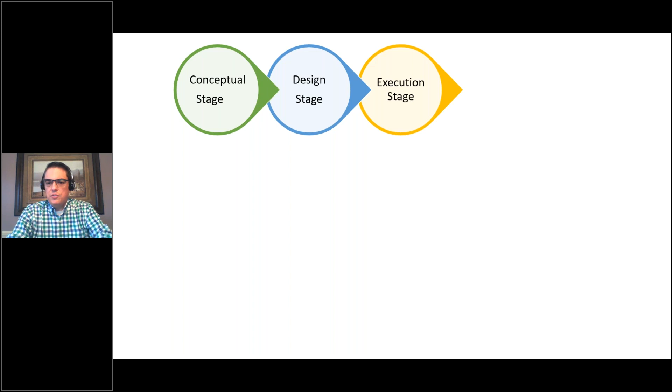Okay, so this morning I'm going to talk to you a little bit about some cost and benefit work that we've done here at MSU on mass timber, and it's really wrapped up around four themes: construction, markets, carbon, and energy. So if we start with construction, we know if we go through the process of constructing a building, we begin with the conceptual design stage, move into design development, project execution, controls, and then ultimately closeout.

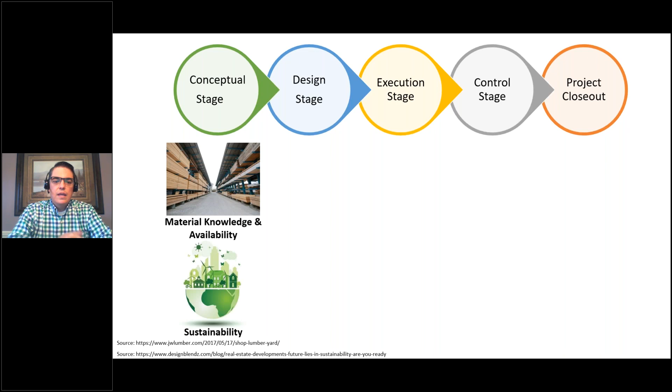What we know from early on in the construction process is material knowledge and availability of materials is a key decision during conceptualization, as well as more and more concerns about sustainability and how a building can be delivered in a sustainable fashion. Similarly, when we get into later design stages in the execution stage, we worry about costs and project duration. And then as we get into later stages of the project, we worry more about customer satisfaction and final costs and project duration.

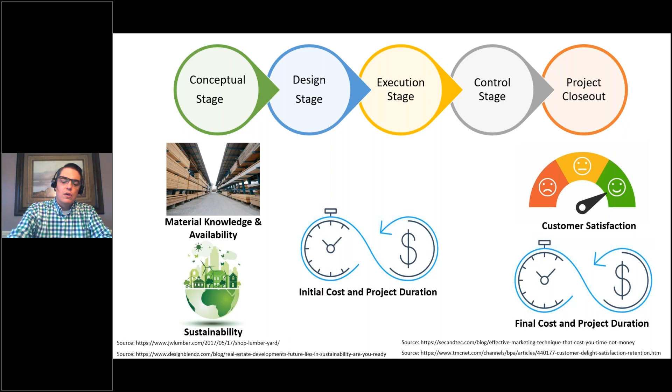And so the question is, what does all of this have to do with mass timber? And these are really cost and benefit related issues and concerns throughout the life cycle of a project. And if we begin early in this conceptualization phase, sorry about that, let's go back to later phases of the project when we get to closeout.

Using some projects that have been executed in the Midwest as an example, if we take a standard $100 million, whether it's steel, concrete, or mass timber project, we know that indirect costs will range somewhere in the $2 to $5 million range, and then time-dependent indirect costs will range from $1.5 to $4 million.

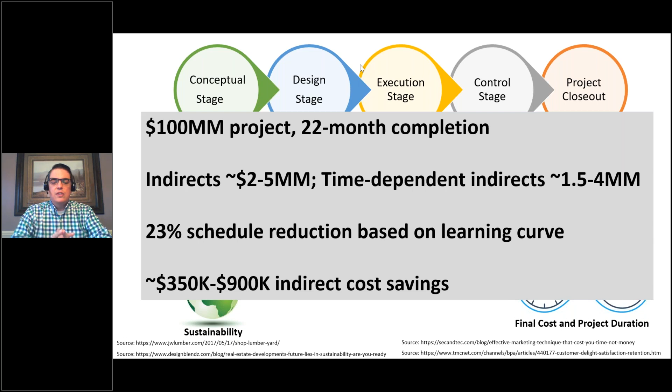If we look at schedule savings that are possible based on learning curve for new firms that are getting into mass timber or experienced mass timber firms that are perhaps executing their third, fourth, or fifth mass timber project, we see that schedule reductions of about 23% are possible, which just on general conditions and indirect costs can lead to anywhere from $350,000 to $900,000 in indirect cost savings on a $100 million project. So the question becomes, if we can save this kind of money just on indirects using mass timber, why aren't we doing more mass timber projects?

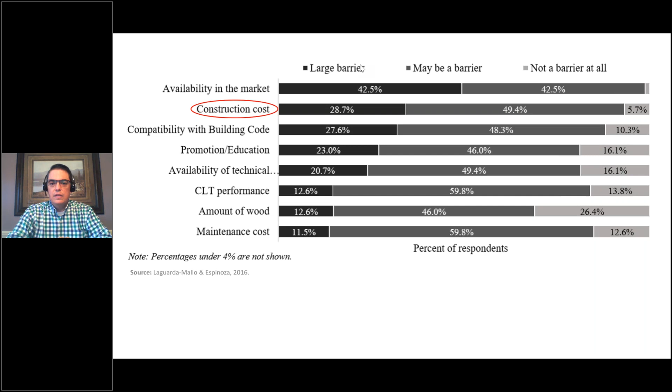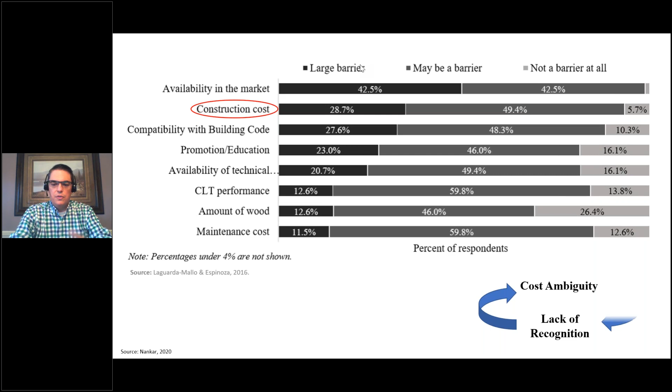And what we find out from studies that have been done within the last 5 years is that really lack of familiarity and concern about construction costing is a key issue that's keeping architects, engineers, and general contractors away from this material. And this causes a cycle of lack of recognition of the material, cost ambiguity, and it sort of keeps the material out of common use in our industry.

So we undertook a project at MSU to look at development of a predictive cost model for mass timber structures as a way to help during that early stage of the construction project's life cycle, during conceptualization and early design phase, to make some of these decisions with more information in hand to decide if mass timber is a viable alternative. But there are some challenges to developing a model like this. We don't have a lot of mass timber buildings in the United States to draw our inferences from. Different projects are, of course, very variable and unique from one another, so there's great variability in a small data set.

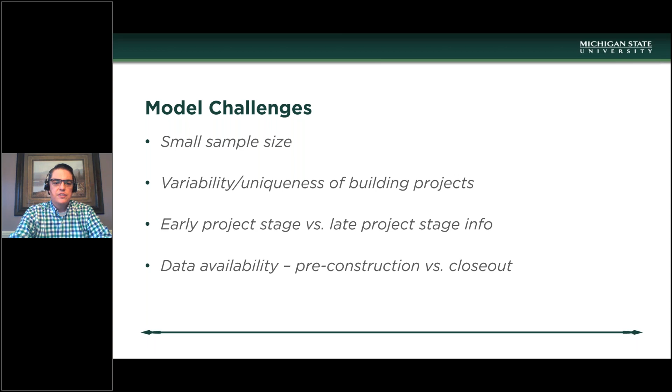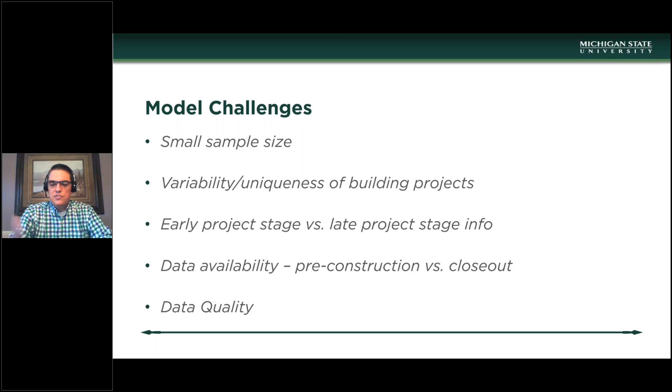The information that we received in some cases in building this model comes from early project stages versus some later project stage information that we would prefer to have. And data availability is a challenge in terms of pre-construction data versus closeout data. So we have a mismatch in the kind of data that's available to us, which leads to some challenges with data quality.

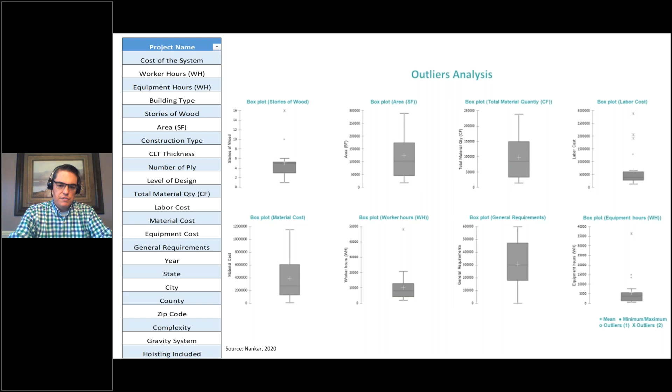Nonetheless, we assembled a database of projects from around the country. You can see the states where the projects were gathered from. And again, many of these were gathered from pre-construction phase data. And then we worked through a number of variables that relate to each of those buildings, and I'm not going to name them off, but you can see them on the left-hand side. We then looked through those variables to see if any of these variables are outliers, things that are so out of the norm, even with a small sample size of about 28 buildings, that they might cause trouble for developing a predictive cost model.

We then used that project data. We ran some regressions. Lucky for everybody on the call today, I'm not going to talk about statistics. This is just the output of the statistical models. The one on the left has many more variables in it. You can see the variables at the bottom: area, total material quantity, labor cost, material cost, general requirements, worker hours, equipment hours. But these are often data points that are not known at the earliest stages of the project.

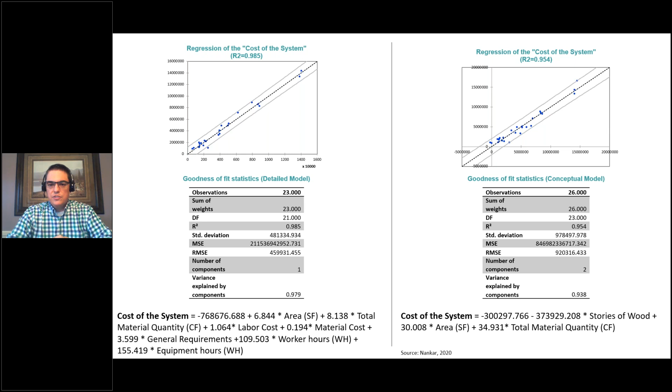So the model on the right only uses 3 variables: stories of wood, gross floor area, and total material quantity for mass timber. Variables that would be well known during early stages of the project. And you'll see, if you remember our R-squared values, even with those 3 variables, we're able to develop a model that predicts about 95% of the system cost just with those 3 variables.

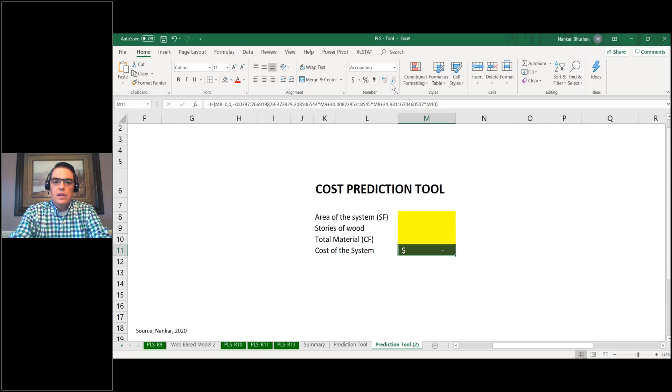So we then test drove the tool. We developed a public-facing, it's just an Excel spreadsheet that anybody can access and use as they wish. Put your data in with values for those 3 variables. And we tested with one case study.

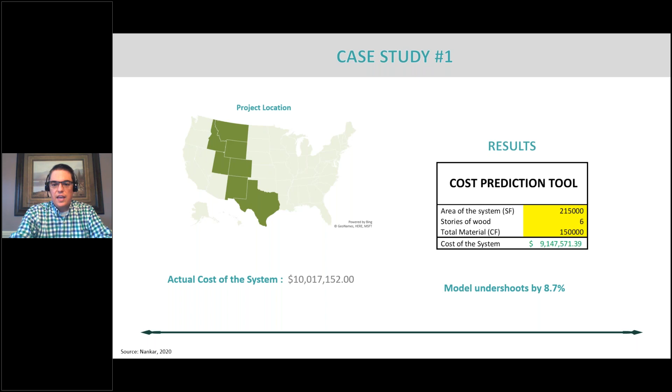You can see from kind of that Mountain West region of the US, actual system cost was $10 million. We predicted 9.147 million for the mass timber system. So the model undershot that building by 8.7%. Again, if you're using this during conceptualization phase and early design phase, something that's plus or minus 10% at that stage of the game is not uncommon.

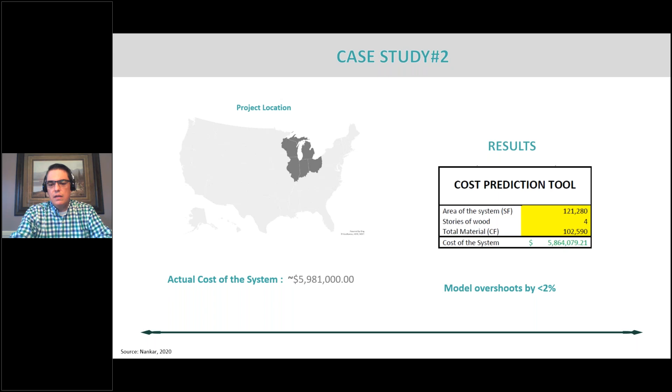We then looked at a second case study that was located in the Midwest. Total CLT system cost was 5.98 million, and the model predicted 5.864 million. So the model, in this case, actually undershot by less than 2%. So limitations to the model, of course, again, small sample size. We were limited in scope. We really reduced a lot of that variability by only looking at the CLT frame elements, so the gravity frame.

We've estimated that the current stumpage price, if you will, for this salvaged material is about $833 per 1,000 board feet. So when the Great Lakes average is usually hovering around $450 per 1,000, that $833 per 1,000 number is high.

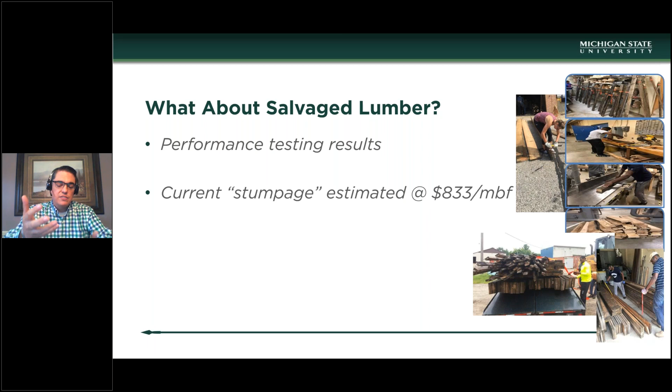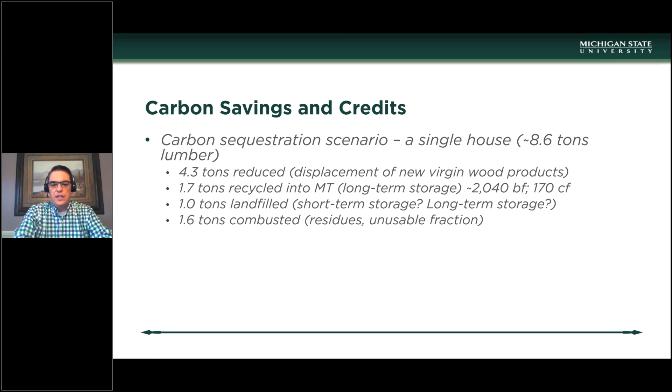As prices go up, of course, we gain some opportunity in that space, but we also have to look at other values for that material, and we can start by looking at carbon savings. We can look at how much carbon is in the lumber in a single family detached house, average house in Michigan, which is about 8.6 tons of lumber. And if we start breaking down some different options versus landfilling all of that material, do some source reduction, do some recycling into mass timber, do some landfilling and some combustion, which are pretty common disposal options that we're seeking to minimize by putting more of this product into mass timber, we find that we can save about 6.4 metric tons of carbon dioxide equivalent by using some kind of mix like I'm showing you in those bullets up above.

If we look back at the old Chicago Climate Exchange, the last effort in the Midwest to trade carbon credits, you don't get much monetary value, even at their peak CCX trading at $7.50 per metric ton, out of a single house. But if you take a number of those homes and develop the lumber to build a STEM building at MSU, based on carbon sequestration values that we've calculated for that building, now you're talking about almost $14,000 of potential carbon credits that would be available at those peak CCX credit trading prices just in the STEM building.

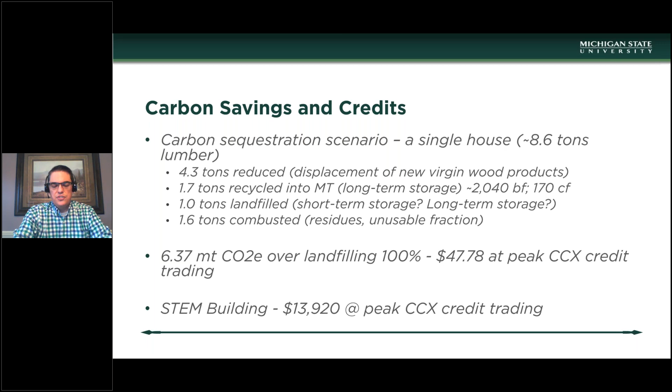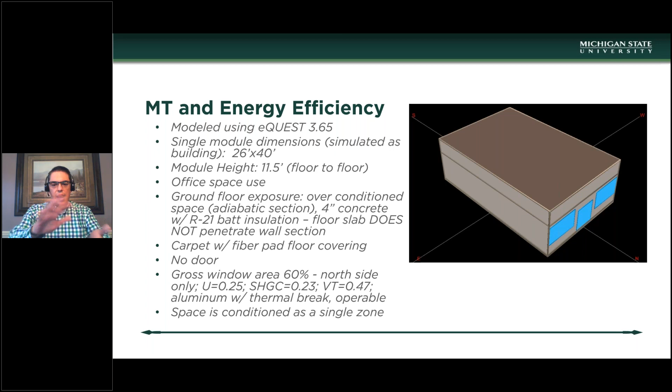And then to finish up, we've also looked, this is for a confidential project that we worked on, just doing some energy modeling of a mass timber and concrete deck option versus a steel frame and concrete deck option. Bottom line story is this. Mass timber consumes about 5.5% less energy per year because of the R value difference in the wall sections that we see in that mass timber building versus the conventional steel and concrete building.

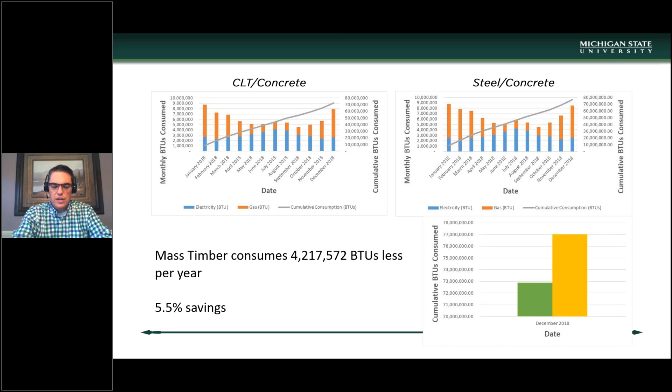So now if we can start to think about where our costs and our benefits come from during construction, and now there's potential cost savings that might pass to the owner and operator of the building, we have to start thinking a little bit differently about what the value proposition of mass timber is, especially when coupling it with things that you heard about last week from Kelly Millenbaugh about educational environments and creating better educational spaces. And John LeFevre, who's going to present after me, I believe, is going to speak more to some of those market and non-market values that need to be considered.

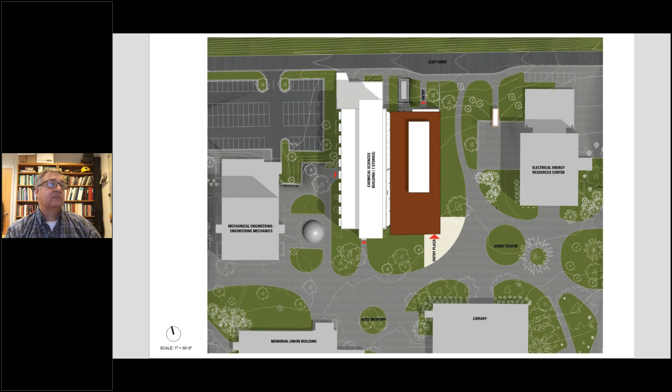So a little bit of the inside of the building, and to give you a better sense of the purpose intended, I'm just going to show you one floor. The green area down on the bottom is intended to be all faculty offices, research offices. Then you transition to grad student offices, and then all the purple is all research space. Configurable, really large rooms with a lot of open space that's reconfigurable, and that's important when we go down the line here and talk about the design restraints and constrictions.

And then at the very top of the screen, you can see the existing chemistry building, and that's also going to include some remodeling to interface with this new building and remodel some of those labs as well. So the other two floors are the same, so I'm not going to go through every floor. Just to give you a sense, there's a lot of research space dedicated for this building.

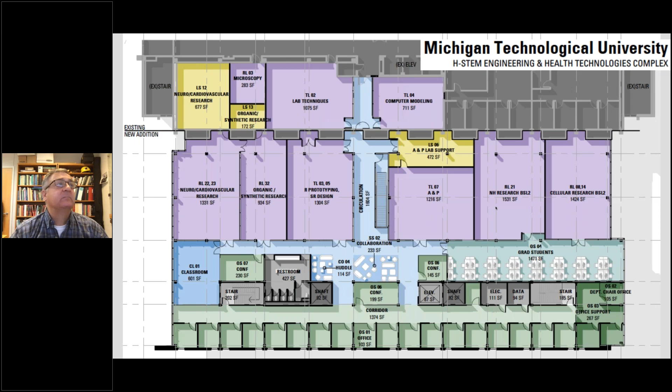Just briefly go over this timeline. So we got the authorization for planning in late 2018, and then we brought together lots of departments for visioning in the spring of 2019. Design team selection, late spring, early summer 19. And this was all going on time, smoothly, and project kickoff July 2019. And then the programming, August, September, conceptual design phase went well, and then we ran into the schematic design, and of course, we ran into COVID. And so since then, everything's been put on hold.

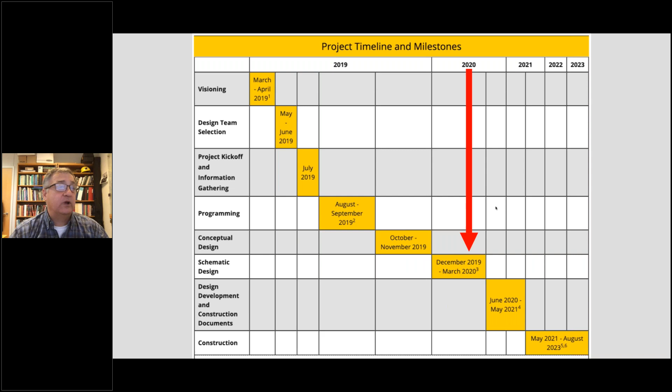But we've had some very recent information about the building that I'll share at the end, where it stands, but I'll go through the rest of this before that, and talk about some more details.

The design team selection. So the design team was Harley Ellis Devereaux, and they're Detroit, Chicago based. And they did not have any mass timber experience, and right up front, that was expressed in the RFQ issued by Michigan Tech that we wanted someone with mass timber experience, because from the very beginning that was expressed as a desire to see that building in mass timber. And so HED subcontracted Arup to help them with all the mass timber aspects of this.

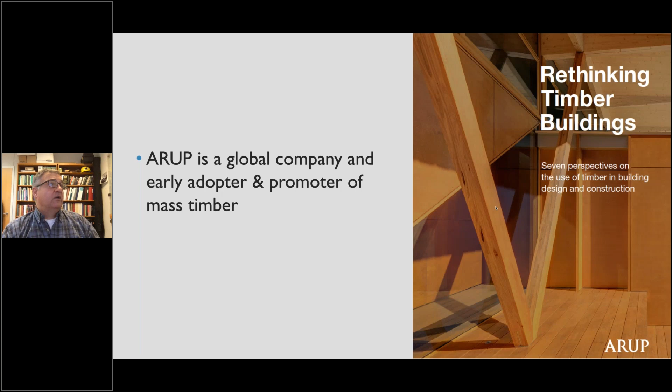And I was really happy to see that, because Arup is a global company and has been involved in mass timber since it really started in North America and overseas as well. And they've been also leading the promotion of mass timber with, for instance, this particular publication, Rethinking Timber Buildings. So I was happy that we had a good team together. And the examination of how we can make this building mass timber was reinforced with a grant that I won from the U.S. Endowment for Forestry and Communities and the Forest Service.

And then after some initial design, Granger was selected as the builder. And I suspect that had a lot to do with their recent experience with Michigan State mass timber and being, again, an in-state contractor.

So one of the products, or one of the things that came out of the grant, was a case study. And while the case study itself is still in development, we contracted or stressed to HED and Granger the need for them to issue a feasibility report for mass timber, to investigate how feasible using mass timber in this building would be, and what the costs are. And so the report looks at all the possible structural systems, structural design criteria, a fire review, preliminary code review, and construction fire safety.

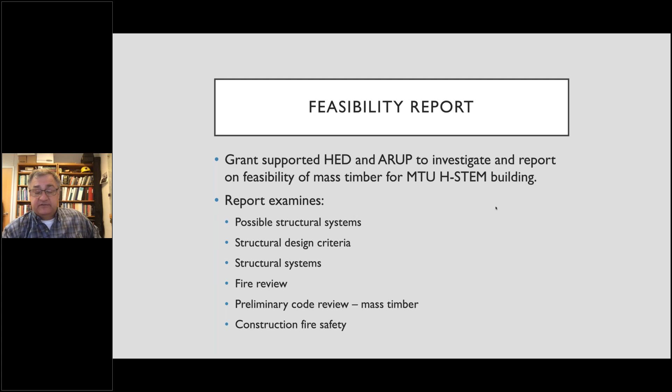And I hinted on this a little bit: some of the important design criteria that I think offered some challenge for mass timber were that we did have some long spans needed for these research labs. And also these research labs are very vibration sensitive, so that means you have to really thicken up whatever structure you're using to keep things very stable. And of course, we wanted those rooms to be reconfigurable so that down the road, if the building is decided to be used for a different purpose, we wouldn't be constrained by small rooms or dedicated rooms. And so many of these criteria called for significant amounts of 5- and 7-layer CLT. And when you get into 7-layer CLT, your costs really start to go up.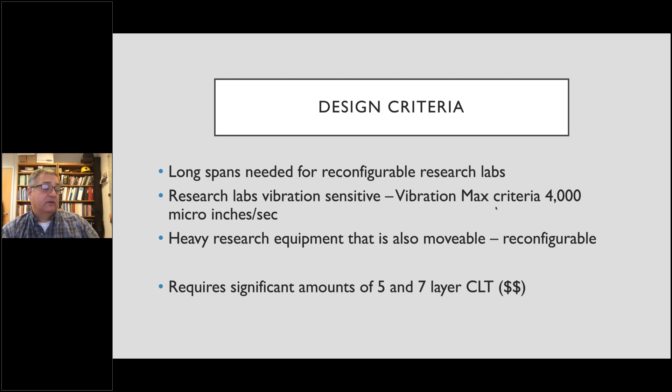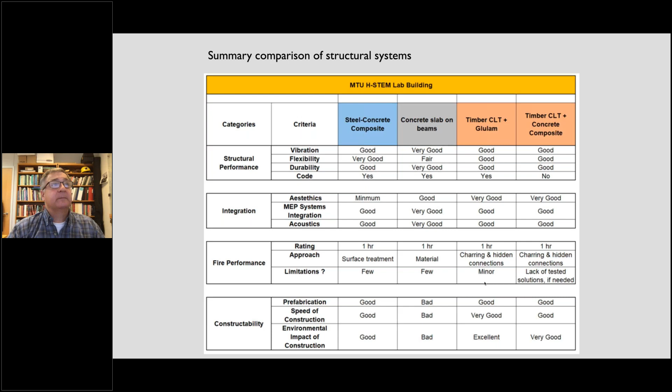Another table that was issued in that report was comparing the different structural systems, the steel concrete composite, concrete slab on beams, and gave them a rating system of how favorable they would be, and compared that to timber CLT and a timber CLT plus concrete composite. So if we just look at the timber CLT, it came out very positive in all of these categories. And so it was a sort of reality check to make sure that CLT and mass timber was going to be a good option for this building. So it certainly passed that with flying colors, I would say.

So now the real big issue, and that's the actual cost for this building to do it in mass timber. So we sent the designs to a few different mass timber vendors across the country. Initially, it was just sent to Nordic, and Granger came up with their own number on what the mass timber materials would cost. And so we saw a big difference between estimates of different companies. So we started with Nordic, and then we said, well, the grant really required getting at least 3 different vendors to put an estimate in. So we went back and actually included 4 different vendors. And you can see quite a bit of difference in dollar per square foot on that. And of course, these numbers are from back in February, so these numbers may have all changed, and I expect they will. But still going with those numbers, those same numbers given in millions of dollars.

And then the big question was, well, how does that compare to steel and concrete? And the steel estimates came in significantly lower to achieve those same design criteria with steel. So we were looking at about a $1.6 to $1.8 million premium to go with mass timber. Depending on what vendor you chose, you might go a little bit less. And that ends up being about a 40% higher building frame structure cost, and that's quite a bit. But for the total building cost, it's only 3.6% higher. So it depends which number you want to look at, but the number most people paying for this are looking at is: is this going to fit our budget? And 1.6 extra is a big challenge.

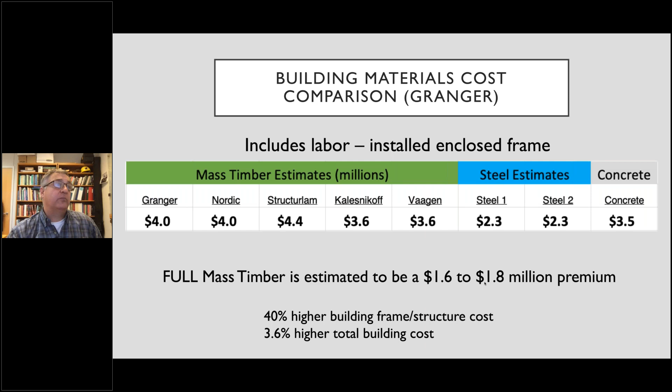So even though there's a lot of discussion and a lot of evidence that shows that there's a lot of time savings and you get a lot of cost savings there, sometimes the numbers don't add up, and it really depends on the companies that are pulling this together and what their cost estimates are. So in our example, these are the results for our building.

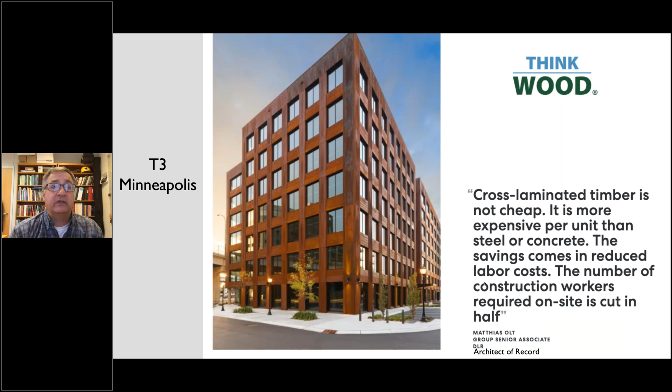So a little bit of, I'd say, speculation on why this is, or a reflection. Mass timber prices we saw varied a lot between vendors, and we're seeing that changing a lot over time. So that's a little worrisome there, that the cost for wood is now going to be much higher.

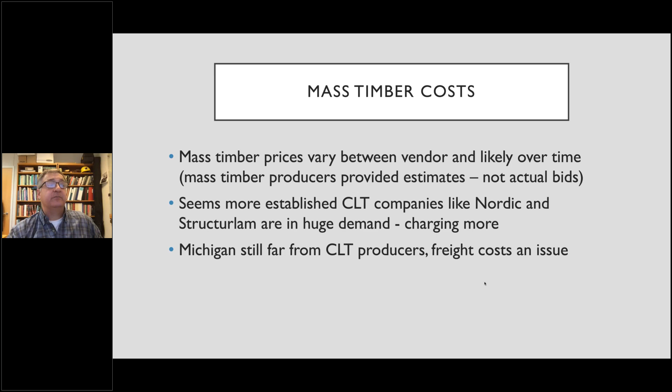And we also saw a big difference between the more established companies like Nordic and Structurlam and the newer companies like Vaagen and, oh, that other one out in British Columbia. They were a little more hungry and they were charging a little bit less, but I don't know where that's going to be now with CLT in big demand across North America. But Michigan still, and probably even more so for Michigan Tech, we're far from those CLT producers. Those shipping costs are going to be an issue.

But I also want to stress this is early days for mass timber in Michigan. I think this reflects that labor and time costs are still a premium. This, I think, is still seen as a risky endeavor. We're going to see a little bit more.

Okay, I see Brenda, so I'm gonna skip to my last slide here pretty soon.

Let's see. Yeah, so I'm hopeful that we're gonna see mass timber at Michigan Tech. We saw a lot of the benefits. People are talking a lot about the long-term benefits, the cost savings down the road. Unfortunately, when you have a budget, it's really difficult, if not impossible, to take those things into consideration. The budget is what you have to spend.

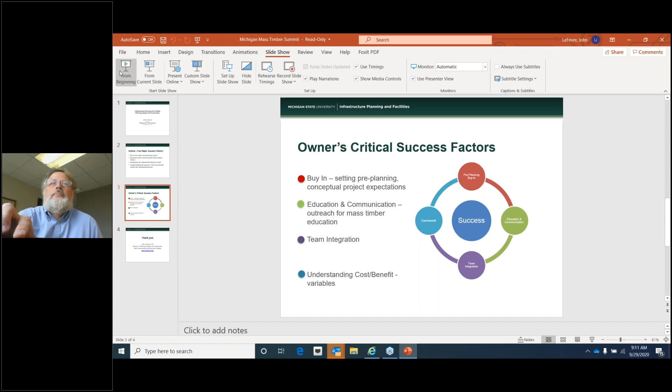Okay, good morning, everybody. Is my volume okay? You sound great. Okay, thanks.

Again, my name's John LeFevre, Director of Planning, Design, and Construction at Michigan State. A lot of you are already familiar with the STEM project here at MSU, and my presentation is going to focus more on success factors and how we sold and brought into the project the ability to deliver a mass timber project, and some of the, call it, softer side of the project outside of strong benefit-cost ratios, on how we made this project reality.

I'm going to outline the buy-in at the project pre-planning phase, the importance of education and communication about mass timber, integrating the stakeholder decision team, and then understanding all aspects of the cost-benefit criteria and their interdependencies.